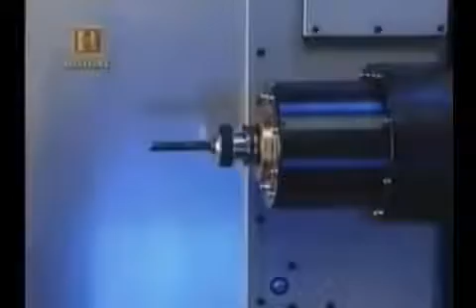As máquinas operatrizes são aparelhos movidos a energia, usados principalmente para criar peças de metal. Tais peças podem ser o molde para os faróis de um automóvel, ou podem ser a estrutura para o corpo de um avião. Podem ainda ser peças de outras máquinas. As operatrizes deixam seu legado gravado ou modelado no metal de todo e qualquer produto imaginável.

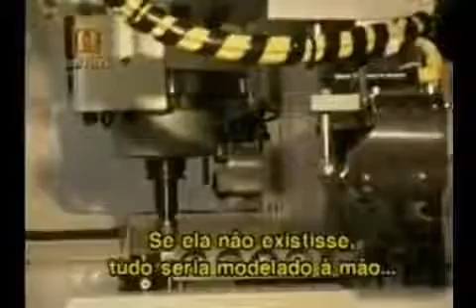It produces thousands of parts that go into the makeup of various items that we utilize every day. If there's no machine tool, everything would have to be shaped by hand, scraped, fitted, or filed into specific shape to fit into mating parts. All these inventions that came about in the late 19th, early 20th century might not have come about as easily as they had if it were not for machine tools.

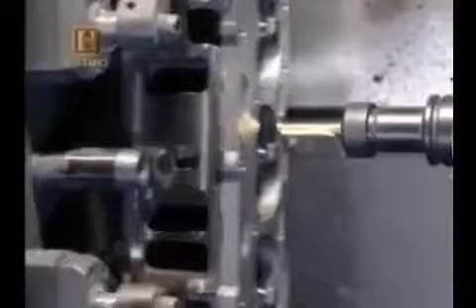As máquinas operatrizes são basicamente ferramentas. Pensemos em uma furadeira manual. A operatriz mecaniza o processo da ferramenta e realiza o trabalho com maior precisão e eficiência do que o homem.

As máquinas operatrizes mais utilizadas atualmente são os chamados centros de usinagem. Eles executam uma série de operações que vão da fresagem à perfuração. Um bloco de metal entra na máquina e dela sai uma peça terminada.

Tudo isso começou na Cincinnati Screw and Tap, empresa fundada em 1884 por George Miller e Fred Holz. Atualmente, ela é uma das maiores fabricantes de máquinas operatrizes do mundo.

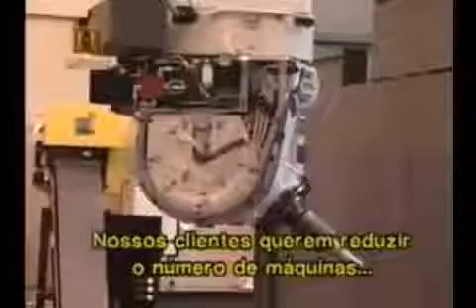What we do here in Cincinnati is we design, manufacture, and assemble all of our machine tools built in the United States. This particular machine is called the U5 because it can operate on 5 sides of a part. And these days, our customers, in trying to reduce setup, they want to complete a part in one operation. Hence, they want to be able to operate on all 5 sides of the part.

Typical customers of this kind of machine tool are tool and die manufacturers. The machine would come in and would actually shape the die, for example, in the shape of a door frame for a car. There are 2 Pentium microprocessors running the computer that runs this computer numerical control machine.

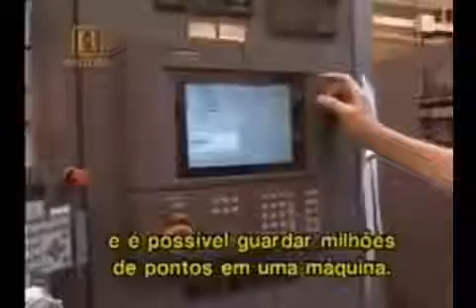The computer directs all the operations of the machine tool. There might be up to 50,000 unique tool points all blended together in one motion. You can store literally millions of data points in a machine like this.

Mas estas máquinas têm seu preço. Um modelo chega a custar $1 milhão e pode sair pelo dobro em caso de itens adicionais.

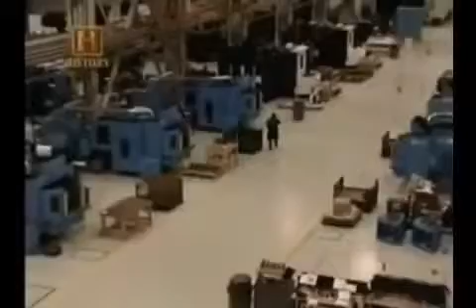Outro grande fabricante de operatrizes foi a R.K. LeBlond, fundada em 1887 com alguns poucos funcionários. Hoje ela é a Makino Company, uma das maiores fabricantes de operatrizes do mundo. São dela as máquinas que produzem peças para o programa ônibus espacial.

This is one of the stages of an impeller for the main shuttle engine. What happens is we take 3 of these, stack them together, and together they'll generate about 76,000 horsepower running at 36,000 RPM. This is a turbo pump for the oxygen on the main shuttle engine, and it has the ability to drain a swimming pool, Olympic-sized swimming pool, in 59 seconds.

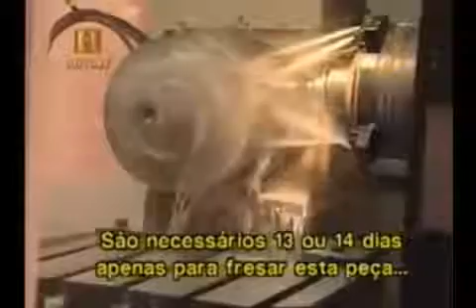A peça é confeccionada a partir de um bloco de titânio de $50 mil, cortado pelo centro mecânico dentro de especificações extremamente complexas e precisas. It takes about 13 or 14 days straight just to mill this part. So this is probably as difficult as it gets.

A máquina operatriz é a extensão das ferramentas mais básicas do homem, as mãos e o cérebro. Formas rudimentares de operatrizes existem há centenas de anos. Os celtas fabricavam braceletes forjados por volta de 100 a.C.

Alguns desenhos mostram amoladores de espada já na Idade Média. No início do século XVII, serrarias e moinhos eram construídos ao lado de córregos e acionados pela água. Na década de 1680, Pedro o Grande usava pequenas ferramentas como peça de decoração.

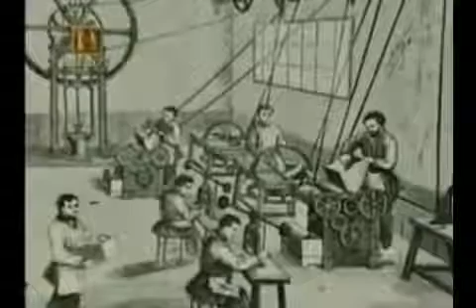Mas a história da máquina operatriz moderna, capaz de modelar metais pesados, começa com a Revolução Industrial Inglesa no século XVIII. Surgia então uma nova fonte de energia, o vapor.

Em 1765, James Watt criou um mecanismo a vapor seguro o bastante para alimentar uma máquina. O mecanismo se utilizava do movimento do pistão para girar um eixo de manivela, processo batizado de força rotativa. A roda de Watt mais tarde proveria energia para a primeira máquina operatriz moderna.

The real beauty of the steam engines, at least related to the machine industry, is that you could put a steam engine anywhere. You didn't need a water source. You didn't need a mill race to operate a wheel. You could put a steam engine of any size in your factory and do machining.

It was really an innovation to have a steam engine that could be hooked up almost anywhere. Steam engines, however, were difficult to run. They took a long time to get started. They had to be well lubricated. They were loud. Unfortunately, they were quite dirty. They were surely not safe.

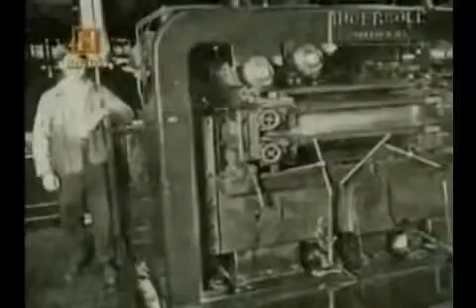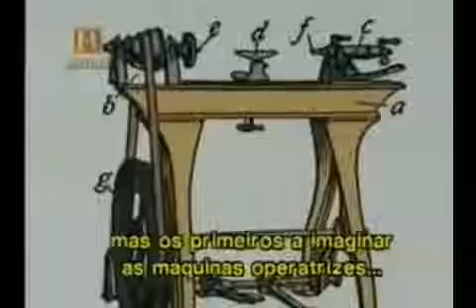We think that we are so far advanced today, and we are so clever and so smart and have so much technology behind us, and yet the early people that devised the first machine tools really were very, very bright individuals. It was a by guess and by golly type of thing that eventually produced something of value. They didn't have the college degrees that are evident today, but by golly, they had a lot of ingenuity and they used it.

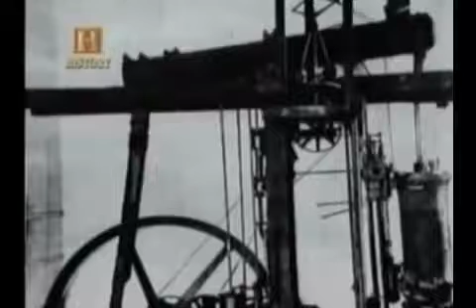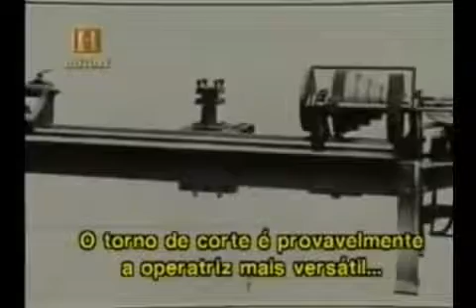The lathe is probably the most versatile machine and the most widely used of all the machine tools, because so many things are cylindrical in nature. And its primary purpose is to cut metal down to a specific diameter. This is important if you're going to make an axle shaft, for instance, for a wagon so that the wagon wheel would fit on. It's important in the manufacture of any type of automobile parts, transmissions, engines. Virtually everything is basically cylindrical in nature. And this is turned on a lathe.

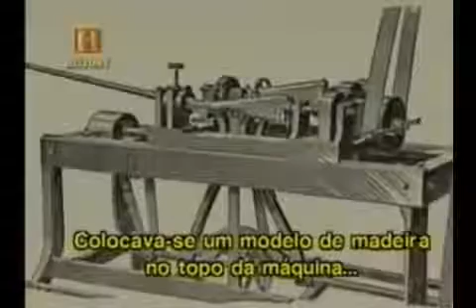He would put in essentially a pattern piece in the top of the machine, and the lathe would follow this pattern to create another identical gun stock in 20-25 minutes. It was this type of machining that they were going for, especially in the firearms industry, where you could pump out these pieces and then assemble them.

O torno sofreu algumas modificações, como as manivelas colocadas de um único lado, para que os operadores não tivessem de se mover.

Em 1845, Stephen Fitch, de Connecticut, criou o torno revólver, no qual várias ferramentas se revezam no processo de corte.

Em 1887, a R.K. LeBlond abriu uma filial em Cincinnati, cidade que ficaria famosa pela fabricação de máquinas operatrizes. Tempos depois, a LeBlond se tornou a maior fabricante de tornos do mundo.

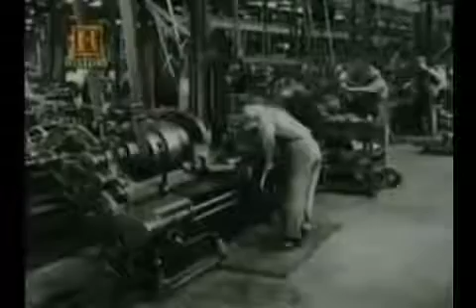This is a 1903 R.K. LeBlond lathe. It's manufactured here in Cincinnati. The lathe is the oldest form of all machine tools. The idea of actually turning an object to shape it into a round shape, or a smoother round shape, goes back millennia, even to the time of the first wheels.

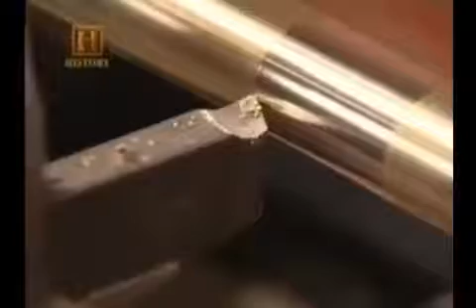Dois importantes aspectos do torno são a velocidade na qual a peça gira e a velocidade com que as ferramentas trabalham a peça. The speed of the lathe is controlled by the pulley size, which is set on the lathe itself. The smaller the pulley wheel that it's set on the lathe, the faster, the higher the RPMs. The larger, the slower. And there's another pulley wheel system which controls the feed rate, the rate that the tool moves either one direction or another on the stock that's being worked.

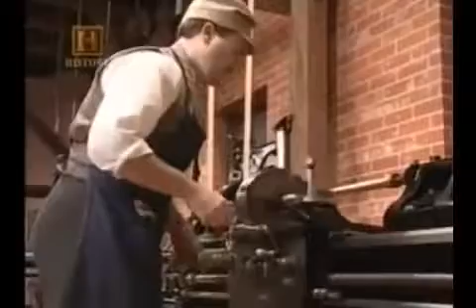Mesmo com a passagem do vapor para o diesel e deste para a eletricidade, os tornos atuais se parecem muito com os modelos de 100 anos atrás. You can make a machine tool faster, you can make them more accurate, you can make them more precise, but the principles behind cutting, shaping, and finishing a piece of metal have remained the same.

Embora os princípios sejam os mesmos, o tamanho é diferente. O eixo de alguns tornos chega a ter 12 metros.

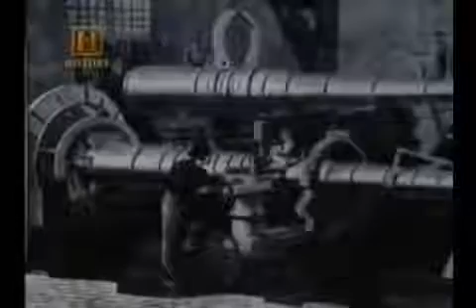Em tempos de guerras mundiais, as máquinas operatrizes trabalharam a todo vapor. As far as the R.K. LeBlond Company is concerned, they had a tremendous role in World War I and World War II. They produced what we call a gun boring lathe for the various artillery pieces that were used throughout the war, the big howitzers.

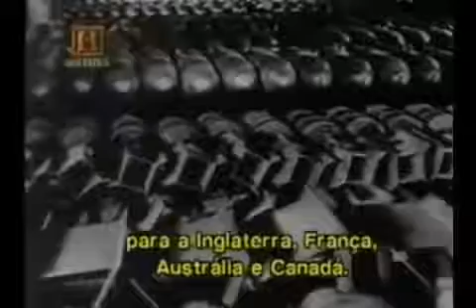Há quem pense que a América não teria vencido a Segunda Guerra sem as operatrizes. Without the quality of machines that we had, which produced quality parts, we never could have provided the war material for England, France, and the Australians, the Canadians. They all used American equipment. I think they made the difference between our winning the war or possibly losing the war. If we had not been able to supply virtually the rest of the world with the necessary war material, we might be saluting the Nazi flag today.

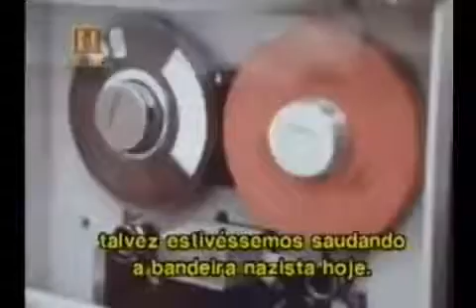Nos anos 60, os tornos ganharam a ajuda do computador e se transformaram nos centros mecânicos de hoje. Most modern turning machines are computer controlled. You have originally spindle speeds of 3,000 to 4,000 RPM. Now you're talking 20,000 to 30,000 RPM. Almost all the things that rely on motion from electric motors involve parts that spin, and most of those parts are produced on lathes and turning machines.

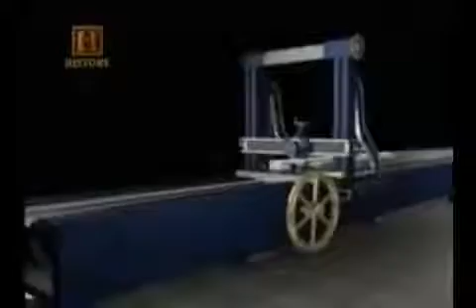Os tornos não foram criados isoladamente, já que outras operatrizes surgiram ao mesmo tempo. A plaina mecânica, por exemplo, foi uma das mais importantes operatrizes do seu tempo. Comparada à plaina de madeira, esta máquina serve para desbastar superfícies de metal. Há modelos em que a peça se move sob a ferramenta, e outros em que a ferramenta se move sobre a peça.

Atribui-se a invenção da plaina mecânica em 1814 a James Fox, um mordomo que virou torneiro.

Um dos modelos mais antigos se encontra na cidade de Windsor, Vermont, no museu que abriga a maior coleção de máquinas operatrizes do mundo. Ed Battison é o fundador.

Most of the early machine tools have no maker's name on them. They were made by the people that needed them rather than the people that were making a market out of selling them. We have an iron planer. It's operated entirely by hand, and it was made with a file. It was cast to rough shape and then filed up. It would make all the shapes you can't make on a lathe.

James Nasmyth era um inglês que trabalhava para Henry Maudslay, o inventor do torno de corte.

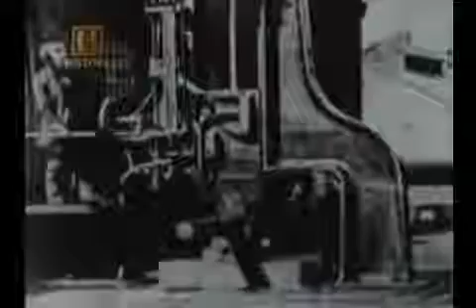This is a shaper from the American Tool Works, built in 1906 right here in Cincinnati. The shaper does a real basic type of job for people. It basically shapes a piece of stock. It goes through an enormous amount of movement just to perform this simple task, though.

Shapers can eliminate simple filing. It can also make keyways or notches for fitted pieces. As the stock is moved left or right, the cutting tool is moved back and forth. When the cutting tool moves to the home position or to the rear, the table moves over gradually, and then the cutting tool moves forward again and takes another bite off of the stock itself.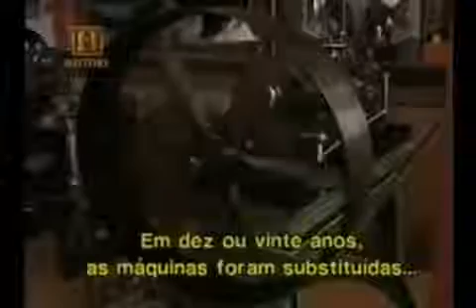We were the up-and-coming Yankees. England often looked down upon the United States in the types of machines that they produced, that they were inferior. They weren't of the quality of the British machines, and in some respects that's very true. We didn't produce the types of large, sturdy machine tools that the British did, but in many respects that worked in our favor because the machine tool industry changed so rapidly in the 19th century that we could afford to build little cheaper machines. Within 10 to 20 years, they were onto something new and different, and those machines were replaced, whereas I think in many instances the British stayed with their old reliable machines, and we surpassed them.

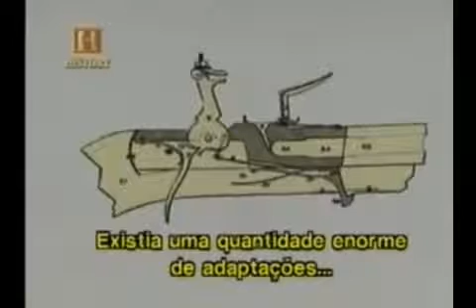I don't think they worried too much about whether somebody stole a patent or not, simply because communications aren't what they are today. I think that there was a tremendous amount of adaptation from one builder to another.

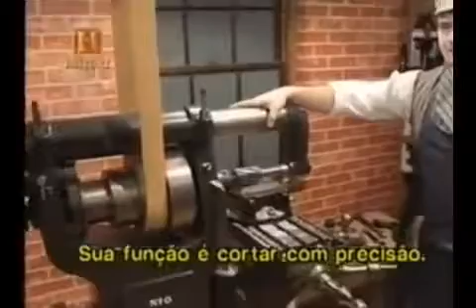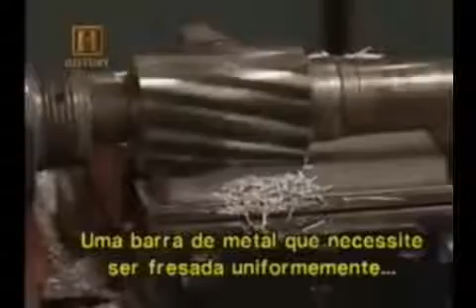The milling machine is pretty much the brains of the machine tool shop. It's used for making precise cuts. This one is a horizontal mill, or what's sometimes referred to as a slab mill. You can adjust the stock that you're working on any axis. This table is moving the stock against the rotating, sharpened steel tool. The steel tool basically chips away or scrapes away small particles of the metal. Any slab of metal that needed to be milled off to a uniform height would be milled on a horizontal mill like this.

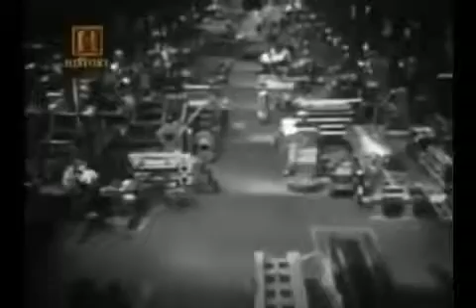The production of airplanes, or jeeps, or personnel carriers, or tanks, or even guns and arms, is all dependent on metal parts, mass-produced metal parts. In World War I, Cincinnati was very busy making basic machine tools for the factories that made war goods. In World War II, we were also extremely busy here making those same machine tools to support not just the U.S., but also the Allies during that period. And we were actually making components, portions of tanks, portions of personnel carriers, in the factory at the same time we were making machine tools.

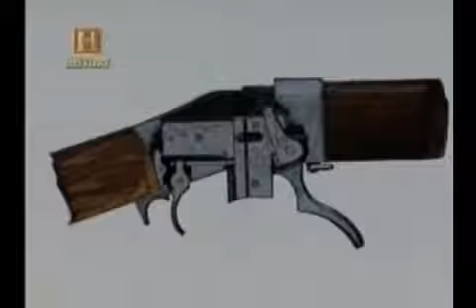They were terrible. Jefferson was an enthusiastic amateur, but there's a lot of things he didn't know, and one thing he didn't know about was interchangeability. Whitney made one gun and 10 locks that supposedly would fit it. Well, that's easy enough to do if you spend time enough and money enough to do it, and he saved the contract that way. He fooled Jefferson and the War Department.

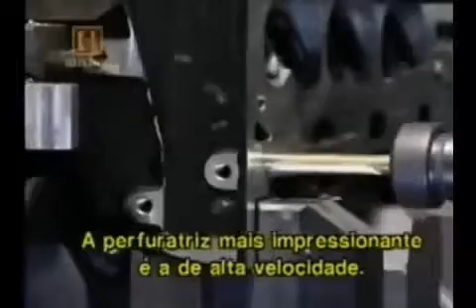I think some of the most impressive drilling machines today are those designed for high-speed hole making. Typically, these drill at speeds that you can hardly see the hole making process. It's so fast. Certain workpieces require hundreds, even thousands of holes. So the faster those holes can be made, the more efficient the drilling machine has to be.

Os avanços do século XIX resultaram em melhores perfuratrizes e um novo tipo de operatriz, o esmeril. No século XVI, Leonardo da Vinci desenhou esboços de um amolador rudimentar. Por centenas de anos, o homem usou formas parecidas para afiar suas ferramentas.

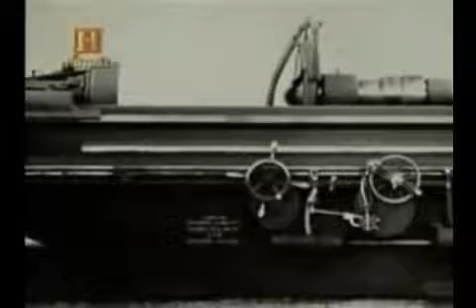Em 1837, James Nasmyth, o mesmo que inventou a plaina, patenteou o primeiro esmeril. Charles Norton foi um dos mais famosos fabricantes de esmeris. Quando a empresa Brown & Sharpe mostrou desinteresse em fabricar a peça em larga escala, Norton viu sua grande chance. Em 1903, ele criou o esmeril Norton, capaz de amolar o eixo de um automóvel em apenas 15 minutos, trabalho que antes levava 5 horas para ser feito. O sucesso foi imediato. Henry Ford encomendou 35 peças para sua fábrica.

O esmeril é indicado para trabalhos em metal pesado. Quando o aço é aquecido e esfriado em um processo que pode causar deformidades, o esmeril é uma das poucas ferramentas que podem trabalhar esta liga.

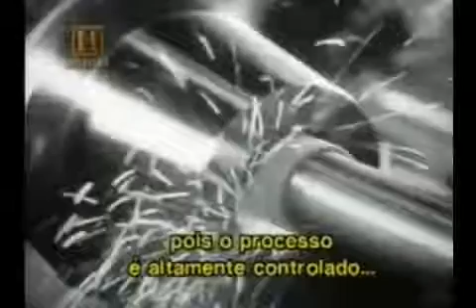Grinding is generally a process that's applied when extreme accuracy is very important, because grinding can be highly controlled and it can be used to achieve levels of precision that would be impossible with other types of machine tools.

O esmeril é utilizado pela indústria aeroespacial para modelar metais como o titânio, o Inconel e o Hastelloy. Ligas resistentes criadas para suportar altas temperaturas. O esmeril moderno é a mais precisa de todas as operatrizes, capaz de moldar uma peça de 1 milésimo de polegada.

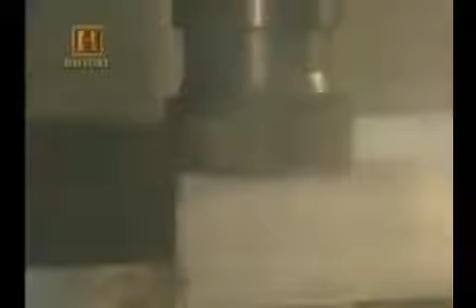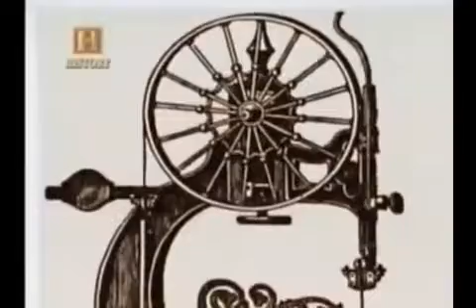Em meados do século XVIII, grande parte das fábricas utilizava a serra para cortar metal antes de ser trabalhado. No início do século seguinte, a invenção da serra de fita foi possível graças à flexibilidade do aço. A lâmina giratória também era flexível, mas resistente o bastante para não deformar.

Power saws are often the first machine tool that raw material is going to encounter, even though they may not have the same glamour that other types of machines have. They're still extremely important parts of the manufacturing process because they essentially create the workpieces that will go to other types of machine tools for complete manufacturing.

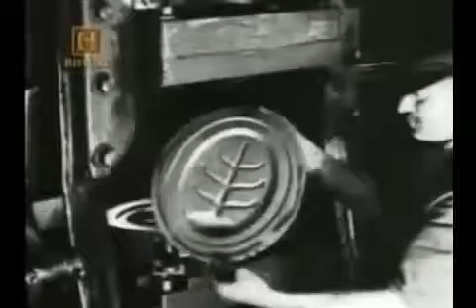A prensa de moldar, sétima e última categoria de operatrizes, não foi criada para cortar metal, mas para prensar e dar forma. Metalworking is broken down into two different types. One, you have the production of parts by the removal of metal in the form of chips, and that's what we do on a lathe, on a milling machine, on a planer. But then beyond that, you have a form of metalworking, which is the forming of metal by pressure, so that you use a press then to form it against a die.

A prensa de moldar foi a última operatriz inventada. Um poderoso sistema de força vertical pressiona a máquina contra a base. A matéria é modelada em uma matriz de metal pesado que dá a forma específica à peça.

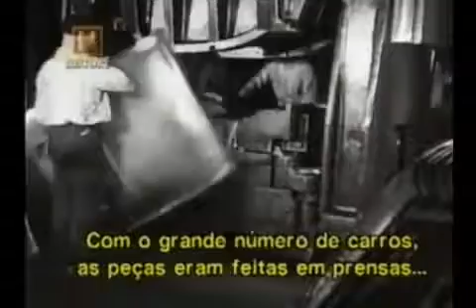When I was young, my father wouldn't allow me to leave the car door open. I'd open the car for some reason and leave it hanging on the hinges. Nothing doing. That was a wooden body, and it didn't hold its shape, so you had to slam the door. But nowadays, you can let the door hang all you want to. It's an all-steel body. And as the volume of cars went up, they started making the parts in presses instead of in woodworking shops.

Mais uma vez, a operatriz foi de grande importância durante as duas guerras mundiais na fabricação de peças para tanques, jipes, munição e inúmeros itens bélicos. Hoje as prensas são mais complexas e precisas, moldando o metal na forma de objetos para todo tipo de utilização imaginável.

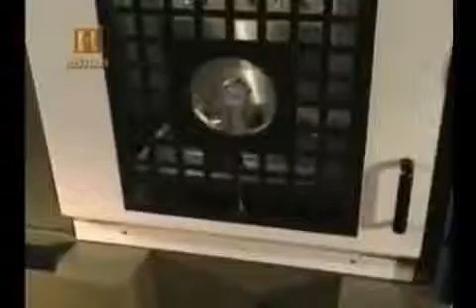A seguir, as máquinas operatrizes de última geração. As máquinas operatrizes são um legado da Revolução Industrial e desde os anos 60 seu design original vem sendo elevado a um novo nível de sofisticação. As maiores mudanças ocorreram na parte de controle.

A posição das ferramentas e a velocidade das máquinas eram controladas manualmente através de volantes. No início dos anos 50, os volantes passaram a ser controlados por cartões perfurados que acionavam uma sequência numérica exata.

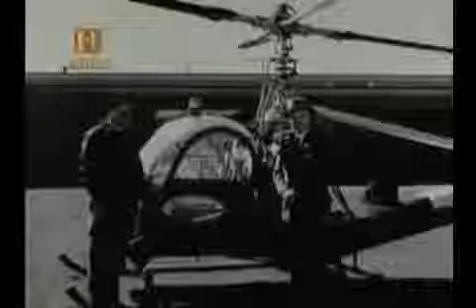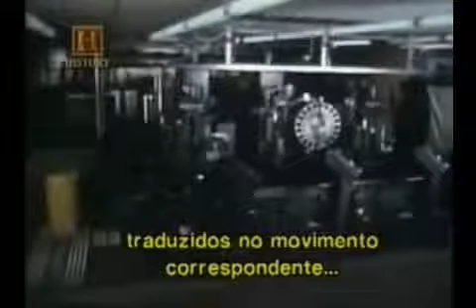The biggest change in machine tools occurred with the introduction of numerical control. That basically made it possible to automate the entire machining operation. Instead of relying on the operator turning hand wheels, the motion of the machine is directed by the numbers read off a tape and translated into corresponding motions that duplicate the shape the designer had in mind.

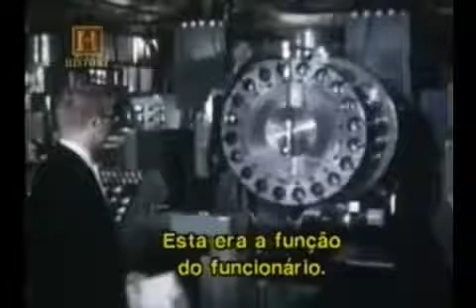Everybody thought this was a great innovation where you had a paper tape that ran through a machine and you put your workpiece on. When machines became more automated, they would have one man to set the machine up and an operator who simply put the workpiece in, pushed the buttons to start the machine, took the workpiece out, put another workpiece in, and the responsibility was on the setup man.

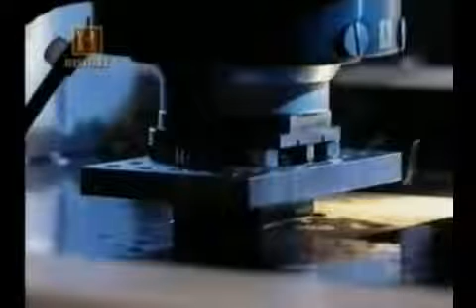They use the energy of a spark to essentially explode a microscopic bit of material away from the surface. This is microscopic, so it's something you can't see with the eye. But as that heat builds up to a certain point, at least as hot as the temperature of the sun, a small bubble of gas forms. And when that bubble of gas explodes, it blows away a microscopic bit of metal from the surface.

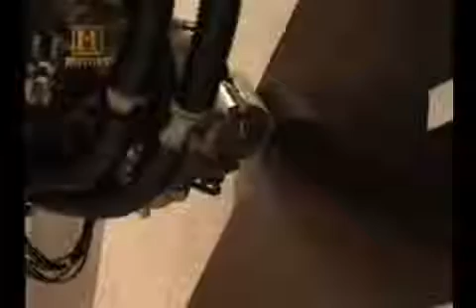Basically, for 100 years, machine tool builders have been creating machines that take raw components such as cast iron, steel, or titanium, and by machining and cutting, we remove metal in order to create a finished part.

This is the reverse process where we take the actual material, in this case fiber composite material, and we lay it and place it, building up the finished part for our customer. What I'll show you here is the actual fiber threads, fiber strands that are running through these 32 tows.

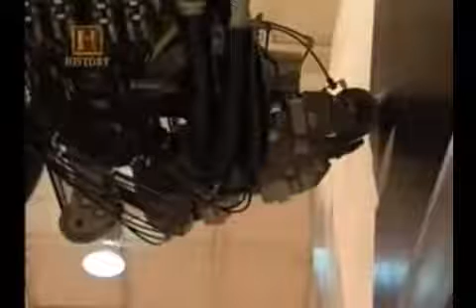I think that in the next 10 years, we will still see the computer and communications technologies as the fundamental driver of innovation in the machine tool industry. It has been a driver for the last 20 years. We expect to see that knowledge start to become embodied in the machine tool itself. And it's the computer and the evolution of computer and motion control technology that's allowing that to happen.